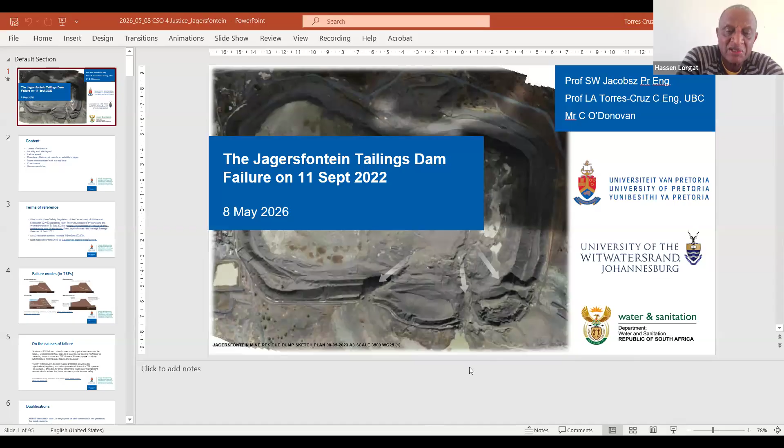So Professor Torres Cruz will start, and then he'll be followed by Professor Jacobsz, and then we will open up for some questions. They acknowledge that they are technical people, so a lot of what they'll be saying will be over our heads, but bear with us. And if there are some questions that you don't understand, some of the phrases that they're using, please, let's challenge each other. You are free to ask, but note full well, we've only got an hour and 20 minutes. So we need to get through the presentations as well, but you can't let misunderstandings roll over. So if you don't understand some of these points, the professors are very willing to engage, as long as we don't get derailed.

For both professors, these are communities, these are mining activists. The last time I looked, I didn't see whether they've attended, but one of the Human Rights Commission's commissioners was also going to be attending. So basically people around the social justice movement will be attending. Not many engineers registered for this. Okay. Over to you, Prof. Torres Cruz.

Thank you. Thank you very much, Hassen. Can you please confirm again, pardon, that you can see my slide in full screen? Yes, we can. Okay, thank you.

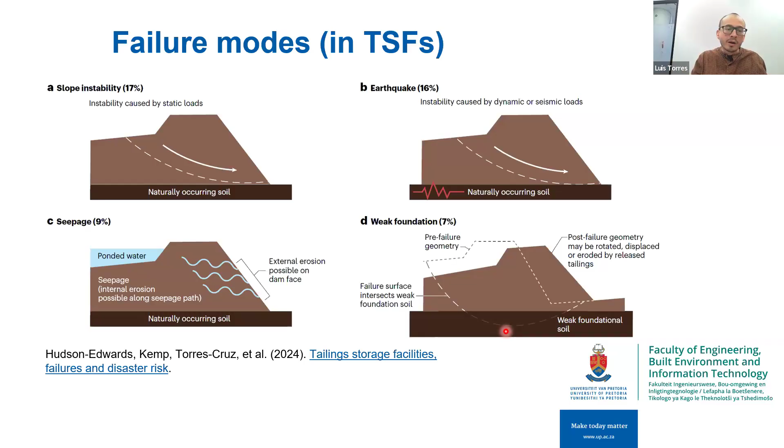So that is one way of thinking about it when we ask ourselves, okay, why did such and such facility fail? One could say, oh, because of the earthquake, or because there was overtopping of the water, or because there was a weak foundation layer, and so on. However, it is important to realize that it is not the only way in which we can think about the causes of the failure. And here I would like to read a couple of excerpts to make this point more clear. Analysis of TSF failures often focus on the physical mechanisms of the failure.

Understanding these aspects, these physical mechanisms, is essential, but it is insufficient for preventing the reoccurrence of TSF disasters. Human factors contribute substantially to bringing about failures and disasters. So what do we mean when we talk about human factors? Well, human factors involve decision-making processes as well as the organizational, regulatory, and industry context within which a TSF operates. For example, human factors could be difficulties for safety concerns to reach upper management, or remuneration incentives that favor short-term production over safety.

Those are human factors, which I repeat, are very important to understanding why a TSF failed, but which were out of the scope of our investigation. We were focused entirely on the geotechnical aspects. And as Hassen also noted, the scope of our investigation also excluded environmental effects of the failure.

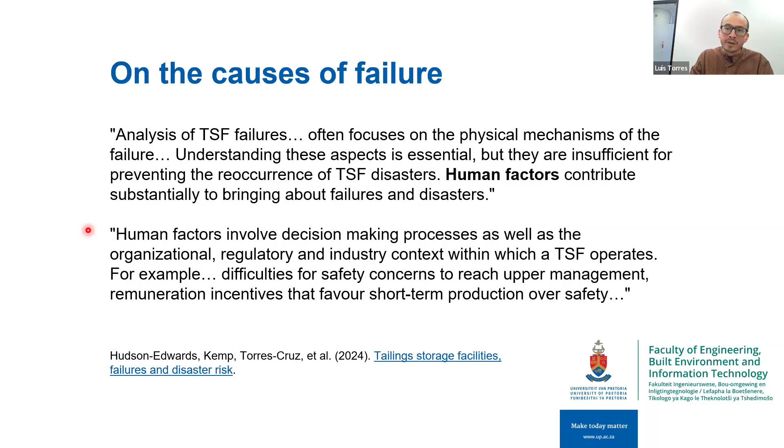A few qualifications about our investigation. We did not have detailed discussions with the employees of the mining company or with their consultants. This was not permitted to us for legal reasons. And therefore, some of our findings could not be tested. We would observe certain things in the satellite image, we draw a conclusion, but we have no way of confirming this with employees of the mining company or the consultants.

So the investigation actually had two components. One was on the geotechnical aspects that we are going to be focusing on today. And as noted earlier, that was led by Professor Jacobsz, with me being the second co-author. And the other one was a dam break analysis, which is also a technical type of investigation in which essentially you model, if there is a breach in the dam, where are the tailings going to flow?

We were briefed by engineers from the Department of Water and Sanitation. Our first site visit took place in October 2023. We conducted an extensive desk study, which essentially refers to gathering all the documentation that you can possibly gather about a site without going to that site. And that desk study included the study of some reports, analysis of aerial and satellite images, and also of survey data, meaning the topography of the site. We conducted our own site investigation in January and March 2024, and also collected some samples of tailings for testing.

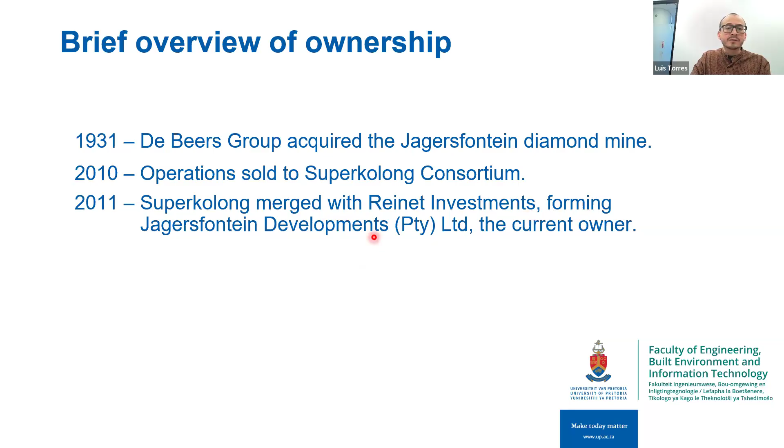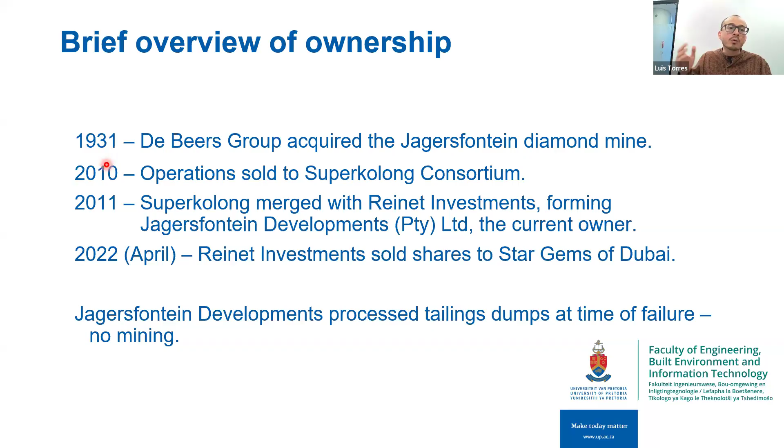In 2011, Superkolong merged with Reinet Investments and formed Jagersfontein Developments, which is the current owner. In April 2022, a few months before the failure, Reinet Investments sold their shares to Star Gems of Dubai. And it is important to emphasize here that after 2010, when operations at the mine got restarted, all those operations did not involve further underground extraction of the ore, but rather involved the reprocessing of the legacy mine waste that was already on the surface, like the one that I showed over here, reprocessing of this mine waste to extract further diamonds.

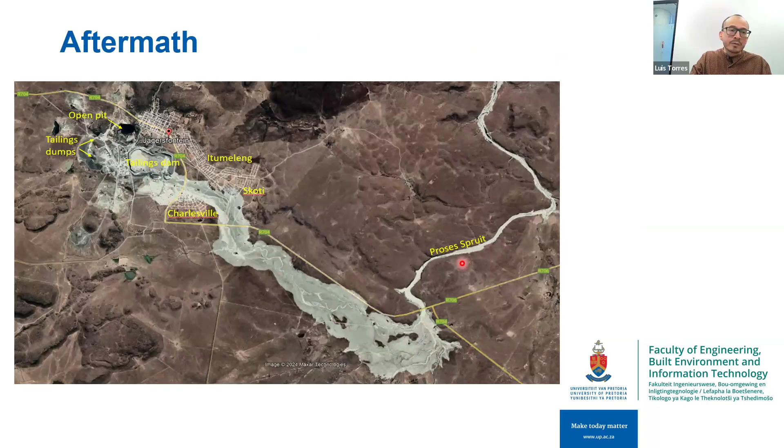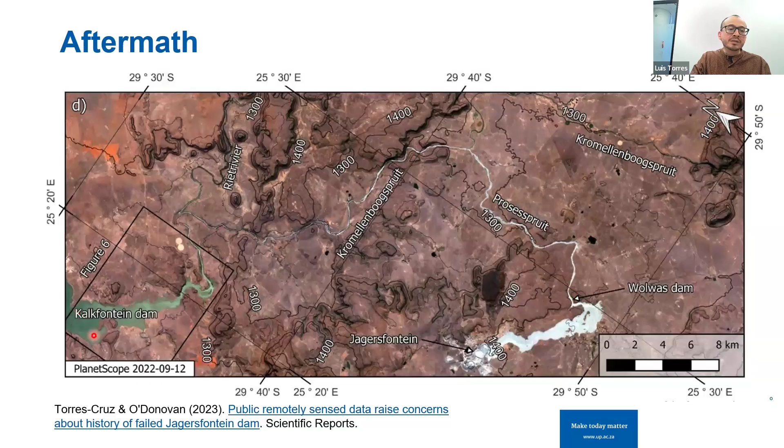Here we see an image of what the site looked like shortly after the failure. Here's the tailings dam. This is the area of the breach, and the tailings flowed approximately 7 kilometers over land until they reached the Prosesspruit. And now if we zoom out again, this is the TSF over here. This is this 7-kilometer flow over land until it reached the Prosesspruit, and then it flowed an additional 56 kilometers until it reached the reservoir of the Kalkfontein Dam.

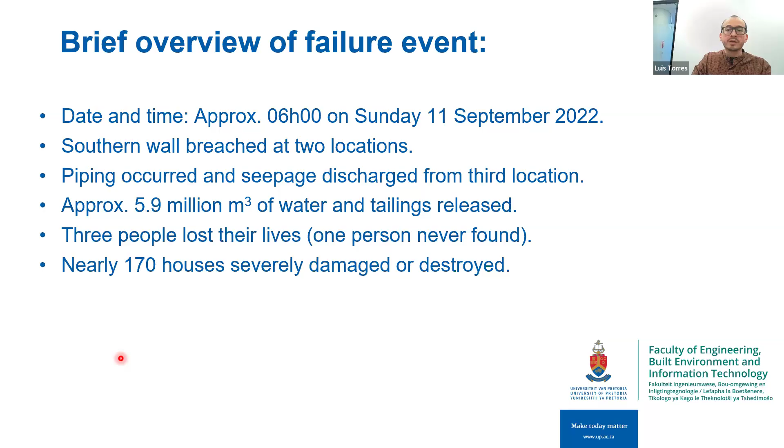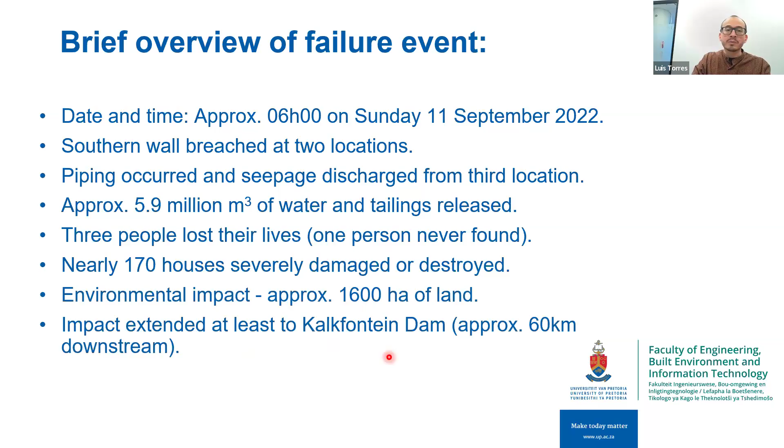So a brief overview of the failure event. This happened at approximately 6 a.m. on Sunday, September 11 of 2022. The southern wall breached at 2 locations, and piping and seepage occurred at a third location. Approximately 6 million cubic meters of water and tailings were discharged. 3 people lost their lives, including 1 person that was never found, and nearly 170 houses were severely damaged or destroyed. There was significant environmental impact, and as I pointed out in the previous slide, the tailings reached the reservoir of the Kalkfontein Dam, which is approximately 60 kilometers downstream from the site.

We move on now to the analysis of aerial and satellite imagery, which played a very important role in our investigation. So when we refer to aerial imagery, this means pictures that were taken from an airplane as opposed to from a satellite.

So let's start with those aerial images. Those images were sourced from the Chief Directorate of National Geospatial Information of South Africa, which actually has a very comprehensive database of aerial images for different parts of the country, including Jagersfontein. So here we have some of those images, and you can see that they date back to 1944, and then we have another one, 1948, 1955, 1962, and 1973.

And what I want to highlight here is that already in 1944, there was a TSF in place. It looked very different from what it looked like when it failed, but it was there in place. And you can see that there are these dumps of mine waste around it. And importantly, these dumps of mine waste continue to be present all the way to 1973, which is 2 years after the mine had closed due to ore depletion.

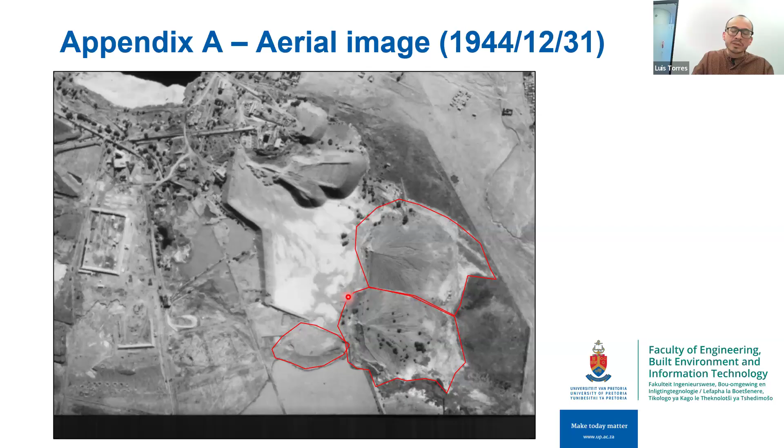So I'm going to zoom in now into this figure from 1944 so that you can appreciate those dumps of legacy mine waste more clearly. Now, having brought your attention to these dumps of legacy mine waste, they do play a role in our explanation of the failure, which is why I am highlighting them to you. Now, Professor Jacobs will proceed to guide you through the analysis of the satellite images.

This table summarizes all the high resolution satellite images that we used. And I just want to point out that we tried to be very comprehensive in the satellite images that we used. We used publicly and freely available satellite images, but we also asked multiple suppliers of satellite images whether they had images of the site, and we purchased every image that we could get our hands on. And with that, I will stop sharing and switch over to Professor Jacobs.

Did I stop sharing now? I think so. Okay. Can I just confirm whether everyone can see my screen? Yes, it's loading. Yeah, we can see it now.

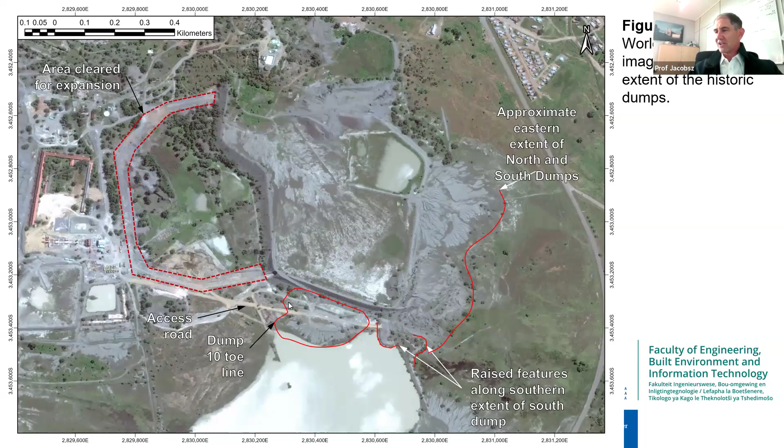So we are then going to move on to the next photo of the tailings dam, and this is at the end of 2010, and you can see that construction commenced on a western compartment of the dam. So they cleared the site, started with the construction of the walls, and I show the outline of the dumps again. The dump to the south of the De Beers Tailings Dam was known as Dump 10. So I labeled this as Dump 10. That is also how they refer to it on the mine.

Moving on to another photo, this is now 2 years later. You can see that the walls of the western compartment have been completed, and the mine had started to deposit tailings in this facility. So you can see that the trees are being submerged. Then we move on to the end of 2012, another photo. You can just see more deposition in the compartment that was newly constructed.

And you can also see the deposition point where I'm pointing with the mouse. You can see this semicircular area from which tailings started to fan out as it is deposited on the dam. So this was the only deposition point on the tailings dam, and all tailings always got deposited from the single point.

Moving on to our next photo. What's happening in this case is that you can see that the Jagersfontein development started to reclaim the old dumps to the east of the original De Beers Dam. So you can see some of the material that's been removed here.

And sorry, I just want to move this toolbar out of my way.

So you can see they are busy removing material, and a conveyor belt had been put in place along the southern wall of the old dam to take the material reclaimed to the plant. So you can also see that compartment, the new compartment in the west, had been substantially filled already.

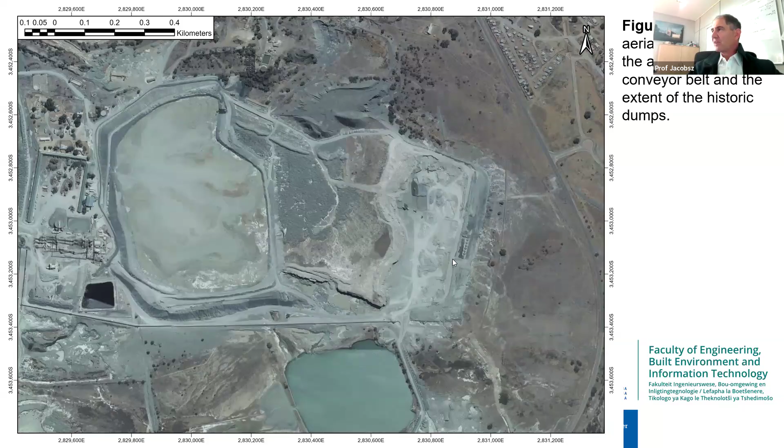Then this is moving to 2016, so approximately 6 months after the photo that I just showed previously. Again, you can now see that the construction had commenced on an eastern compartment as well. So where the old dumps were removed, the walls were extended, and a new embankment was built, and a new compartment was being commissioned.

And you can see that some slimes or tailings had already been deposited in part of this facility. Important to note that the conveyor belt is still in place, and that most of the material that comprised dump 10 has not been removed. That material is still largely there.

Then moving on to 2017, what happened in this stage is you can see that deposition had advanced very significantly in the dam, in the eastern compartment. The eastern compartment was now beginning to submerge the old De Beers Dam. You can also see a new dam wall had been constructed to form a containment around the old De Beers Dam. So the old De Beers Dam fell within this newly constructed dam.

So this wall that I'm pointing out here, this is the area where the wall failed. It's very important to note that this was constructed from 2015 onwards. It is a new wall that failed, relatively new. Nothing to do with the old De Beers Dam. So what failed was new.

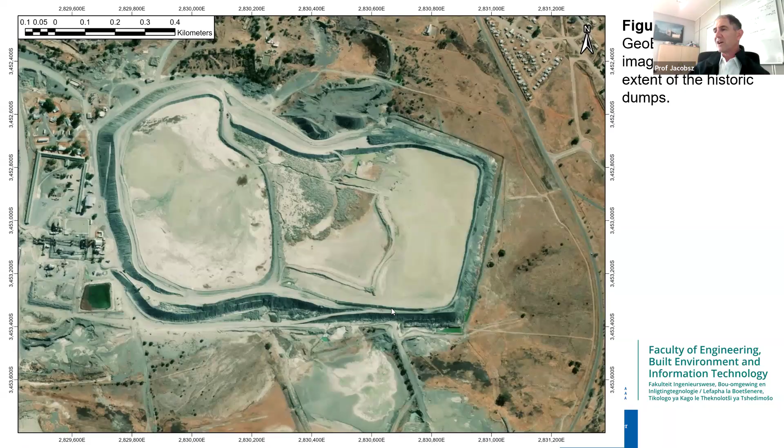An important feature in this particular photo is that you can see an access road running along the southern wall of the dam, and the access road here is fairly straight and it goes on to the dam with a ramp. And to move to our next photo, this is now 2 years after the previous one.

You can see that the dam had grown substantially. The old De Beers Dam had been buried, and you can see that compartment one, the western compartment, had also received quite a lot of tailings, but the new eastern compartment now completely submerged the old De Beers Dam. I want to point at the access road running along the southern wall of the dam. Important to note that this is a straight road. This is February of 2019.

Then this is a satellite image taken 6 weeks after the previous, dated the 22nd of March 2019. And it was a slightly overcast day, but there is a feature that I'm pointing out here that points to instability of this wall. I'm going to go one photo back. This is what the photo looked like 6 weeks earlier. And there seems to have been quite a bit of movement in this part of the wall. I will show you some images later which will show this movement more clearly.

You can also see that between the two photos, this is again February, the dam was empty. Rain occurred from the middle of February and it filled the dam. Dam completely filled. And I'm now going to go to the next photo, which is 2 months later. So this is the May 2019 photo.

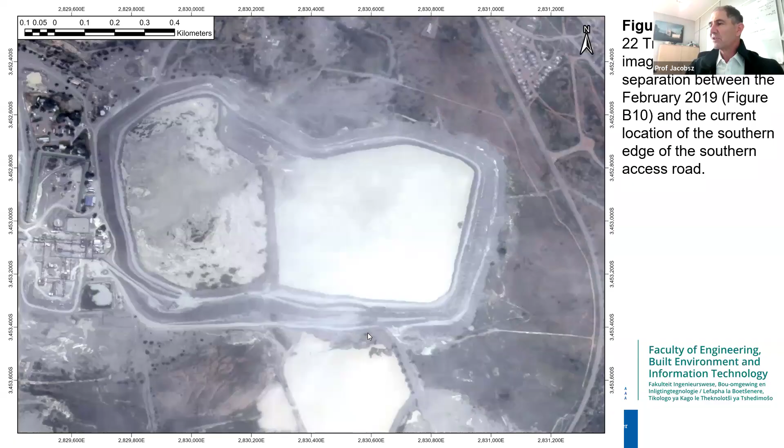And if I go back a few photos and play through these photos, you can clearly see the deformation taking place here. So this feature in the dam, I think it is some aquatic vegetation, is being buried by this advancing slope here. So let's go on to another photo.

This is now early in 2020. There was a circular feature constructed in the dam due to a bulldozer that got caught up in the dam. It fell into the dam and they rescued it. We had to really scratch our heads as to the reason for that, but it turns out that it was to rescue or retrieve a bulldozer. I just want to go to the next photo. So this feature has nothing to do with the failure on the dam.

What you can see now is this is now 6 months later again, so July of 2020. And by this time, the circular feature had been covered, largely due to the deposition of more tailings in the dam. And you can also see that the partition wall between the two compartments is beginning to be submerged, so that we were busy forming one big compartment on the dam.

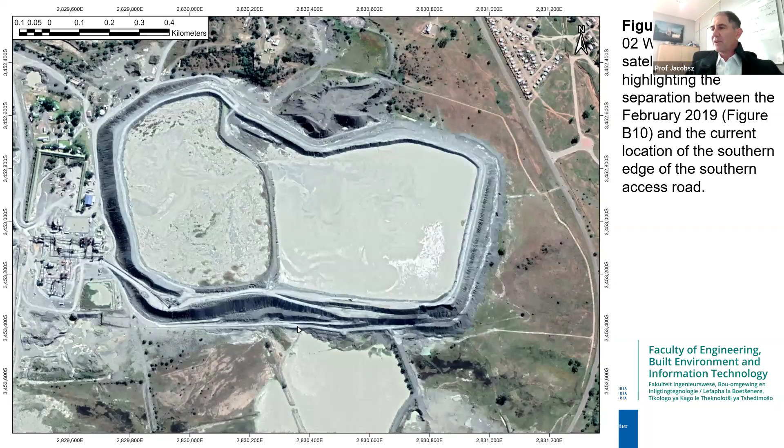I'm going to just go back a few photos, and I want you to look at the alignment of the road. The access road along the southern part of the dam was a straight road. When we go through the photos, you can see that this is now not a straight road at all anymore. It is curving very substantially to the south. So if I play through the sequence of photos, you can get a feel for the magnitude of movement which is busy taking place here.

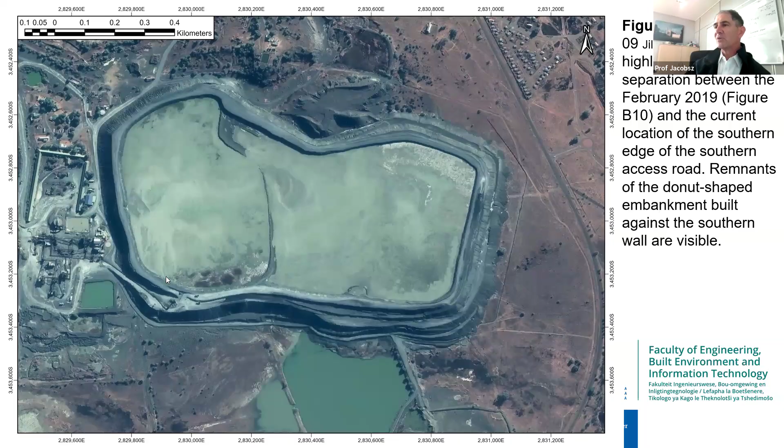Then I'm going to look at another photo. This is now a month later, and say another couple of months later. And the point is this: we see this continuous movement taking place along the southern wall. If you look anywhere else in the dam, we just see the normal raising of the dam, and you don't see outward movement, except opposite this water dam. This water dam, by the way, is known as Dam 10. So locally it was referred to as Dam 10.

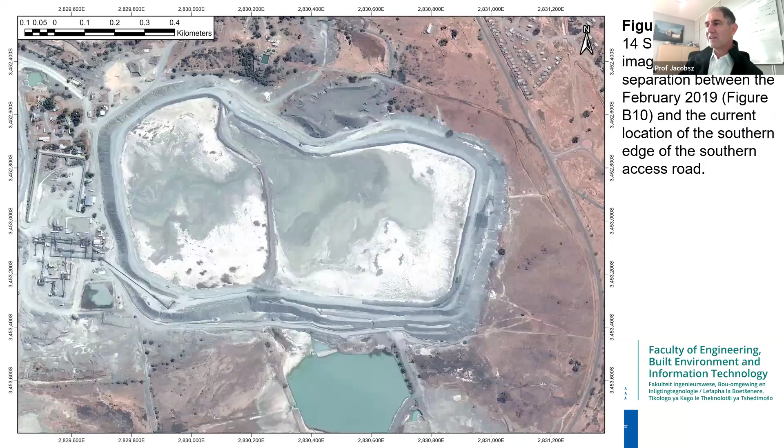So what we are showing you in this photo is going back to February of 2019. In late February 2019, after it started raining and the dam filled, movement started to occur. This is 3.5 years before the dam failed, and these movements were progressively advancing and developing, getting larger and larger until the failure. So this is now in May of 2022.

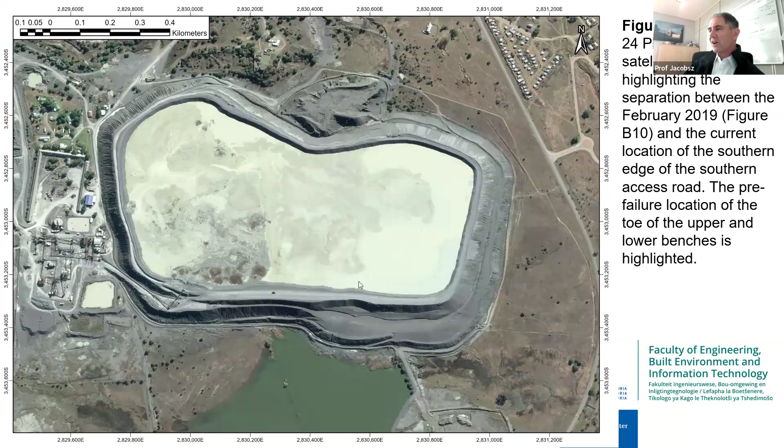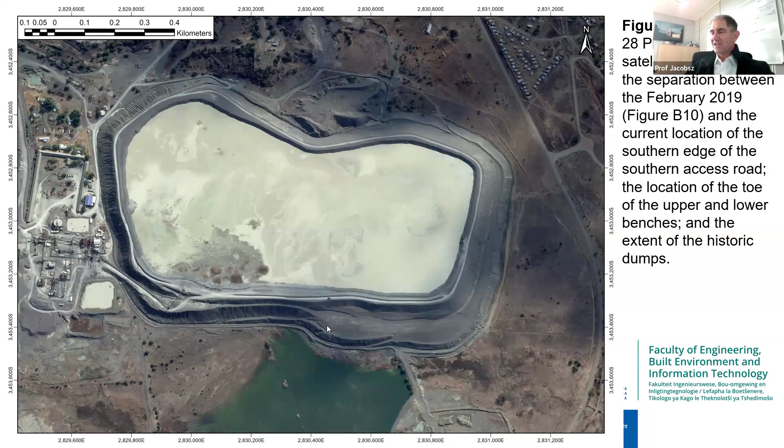We've got one last photo that we were able to purchase from July of 2022. And in the next photo, you can see this is the failure. This was taken by satellites the day after the failure event. But what we have seen is a very large amount of movement in the southern wall of this dam leading up to failure. So we have now examined the sequence of satellite images that show to us that there was a lot of movement taking place in this dam as far back as 3.5 years prior to failure.

So what I want to show you now is a completely separate and independent source of satellite images. These are so-called PlanetScope satellite images. It's a different satellite image provider, and they provide lower resolution images. I want you to keep an eye on this area where I'm pointing. This is where the dam failed. And the date you can see on your right-hand side. I'm going to advance these photos forwards and backwards a couple of times, and that will hopefully illustrate to you the deformation taking place along the southern wall.

So you can see this is around the date when that high resolution satellite image was taken, movement taking place in this area, and you can see construction busy reinstating the road over that, reinstating the crest of the wall. There you can see construction taking place in that area. But if I move through these images fast, you can see that toe advancing outwards over time.

I think it's maybe not perfectly clear due to the connection speed that we've got, but I hope you get the appreciation of the movement that took place in this area during the months of February and March of 2019. So a lot of deformation taking place in that area at the time. So this is from a completely separate satellite image. This is another satellite image. So this was PlanetScope. Looking at the before photo, this was taken on the 8th of September. The failure was on the 11th of September.

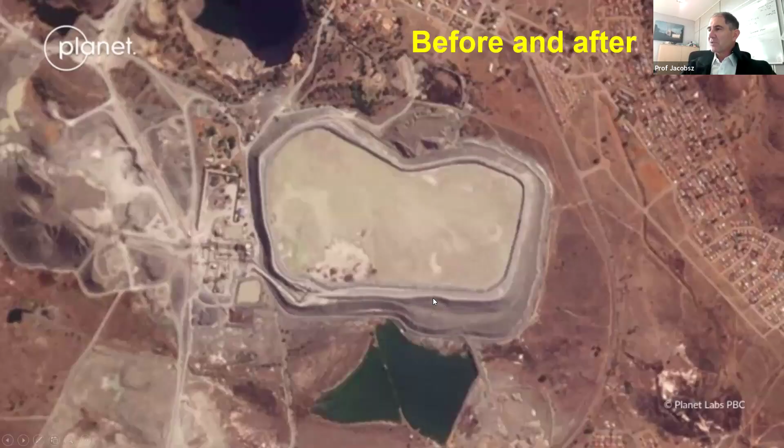And if we look at the photo on the 12th of September, then you see this, the breach had occurred. And when I play between these photos, you see that this block along the southern wall where the dam failed displaced outwards by a large distance. We do not see these outward displacements anywhere else on the dam, but it seems that this wall slipped on something underneath and it moved to the south, and that resulted in these failure zones developing. So a large amount of deformation took place.

So we were interested to figure out why was it possible for this dam wall to slip outwards on its foundation, as we are seeing in these photos. So this is a report that was written before the dam was built, just to illustrate in concept how they anticipated enlarging the old De Beers Dam. And the wall that failed is the one shaded in this pinkish color. And you can see the southern part where the failure occurred is where this wall was constructed over the old dump, which is called Dump 10, that I referred to previously.

So in this area where I'm pointing out the eastern parts, these dumps which covered the ground here had been largely removed. But Dump 10 had never been removed, and construction of the dam wall occurred over this material. I just want to show you a sequence of images just to illustrate to you how the dam was built.

So this red wall or pinkish wall was built like that shown there. So we call it the starter wall, and then that provided some containment, and it is made from a material which is called grit. So nice coarse grained material that they got from the tailings dumps that Professor Luis showed earlier. So they built this from the coarse grained material. It's a very good material, nothing wrong with it, and it is good for dam building.

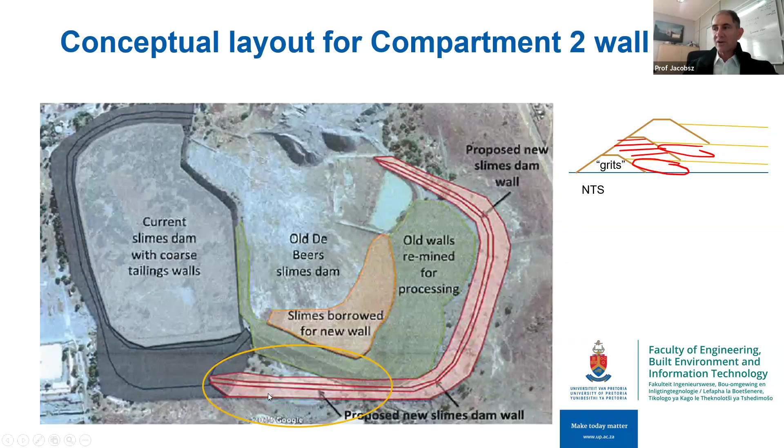That is our conclusion. You don't see movement in the dam wall anywhere else where this fine material from Dump 10 was not present. And our conclusion is that this material had a very low strength. There is evidence of that low strength from our own testing and testing by others as well. So a bit of a preview is why the dam actually failed, because this part of the wall was built over Dump 10 without removing the material that formed Dump 10.

What I want to do is just to highlight a number of as-constructed details of this dam. Tailings was only delivered from a single point in the west. So this is a picture of the dam, and the delivery point is where the arrow points. Usually we have a ring pipe that goes around the dam so that we can deposit tailings anywhere. In this case, there was only a single point. There was also no decant system on the mine. Usually near the middle of your tailings dam, you have a pipe, and excess water will flow into that pipe, and that is how we remove excess water from a dam.

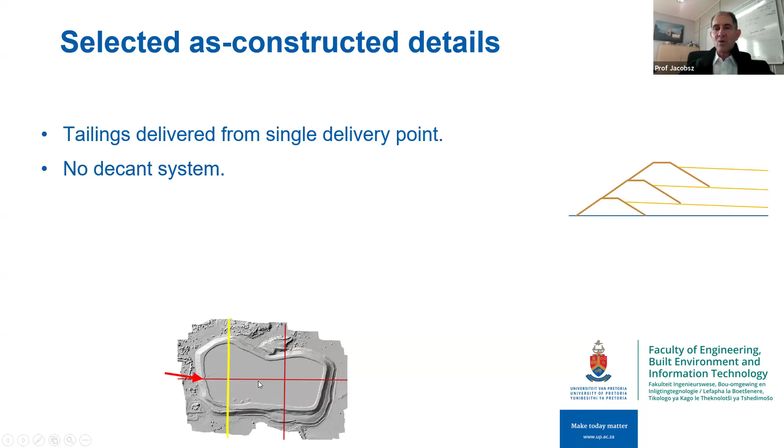In this case, there was no such facility, so water had to leave the dam by means of evaporation, or it had to leave it by means of seepage. So you can get seepage and you can get evaporation, but there was no other way to remove water from the dam.

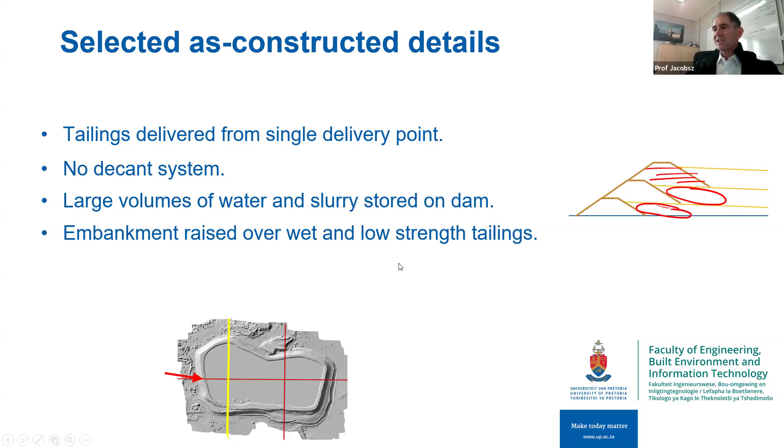It is also important to note that a large volume of water and slurry, so fine slimes, were stored on the dam at all times because it was not possible to remove that material. The embankment was therefore raised over wet material of fairly low strength. So when part of the embankment was raised, you would have had to construct over these fine-grained, weak materials, slimes over which you had to build your raised sections of embankment. So that is a couple of aspects that I feel is important for us to appreciate.

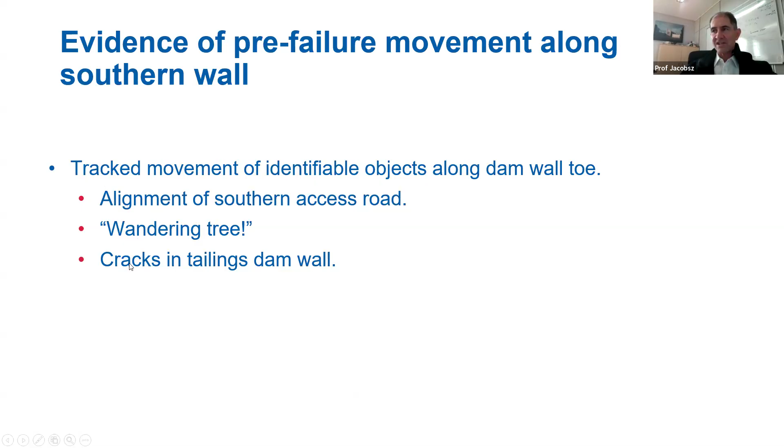What I want to show you is a couple of additional satellite images that show additional movement, more than what I've shown you up to now. So there's been evidence of movements along the southern wall of this dam for 3.5 years prior to failure. And I want to show you the movement of the access road. There's a tree that moved. We call it the wandering tree. And then there are cracks in the tailings dam that we could see even on Google Earth images that anyone could access.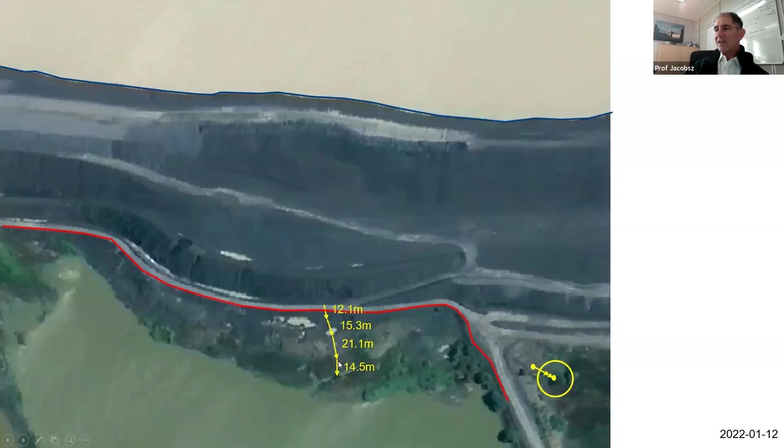So if you move on to the next photo, this is the new road alignment, and the patch had now moved by 12 meters. Looking at our next photo, the patch had now moved another 15 meters. The road alignment is very significantly not straight anymore. It used to be a straight road. Looking at a photo sometime later, you can see another 21 meters in that shrub. And then it moved 14 meters more, 7 meters more, and then the failure occurred.

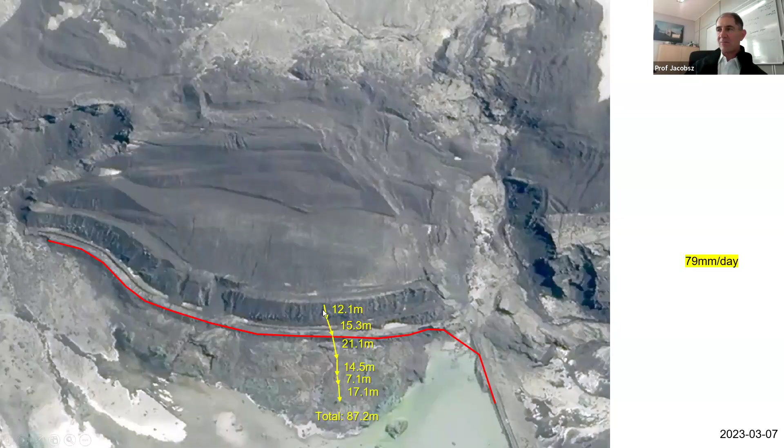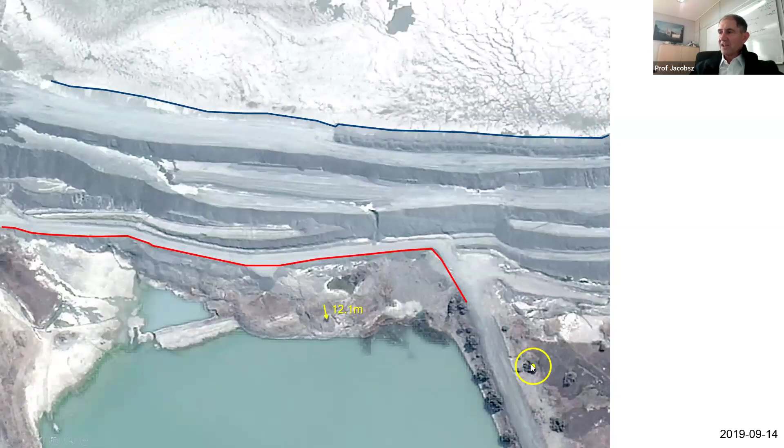There's another disconcerting feature, and this is this tree, which I circled with this yellow line. It's not very clear to see on this overcast day; the photo was taken under overcast conditions. The next photo shows it better. There's the tree, and this tree then started to move. There is the same tree. You can also see there's evidence of deformation in this area where I'm pointing. And then the tree moved, and it was beginning to walk past its neighbor.

You can see it was standing here originally, and it moved over the course of the 3 years prior to failure by approximately 28 meters. The fact that that tree remained green tells us that it must have moved with its root system intact, which tells us that this is deep-seated movement, not only superficial movement. So, very substantial evidence of movements along the toe of the dam prior to the failure event.

What I want to also show you then is evidence of cracks. This is a Google Earth image taken in September of 2020, 2 years before the failure event. If you look at this area where I'm pointing with the mouse, you can see a faint feature which looks like a crack. The resolution of this image is 30 centimeters, which means that the smallest feature that a pixel can identify is about 30 centimeters. So the fact that we can see this crack on a satellite image tells us that it must have been substantial.

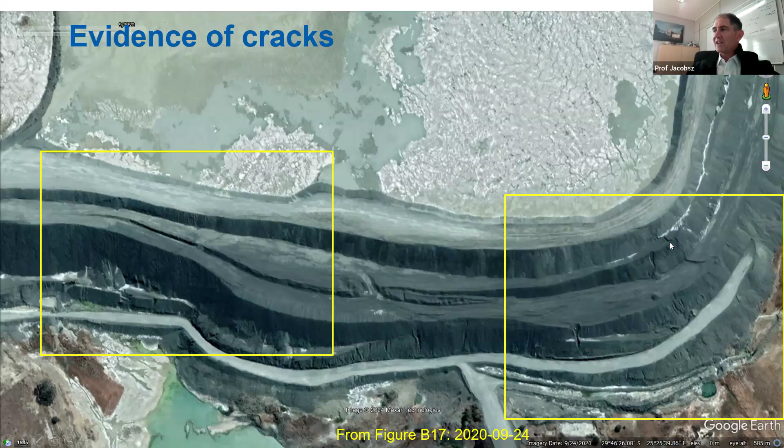Then if you look at the eastern part, near the southeastern corner of the dam, there's also more evidence of distress with crack-like features that I'm pointing out. If we zoom into the first one that I showed, we can see better that the crack existed, and then I can show you the other one as well. There's some evidence of the crack.

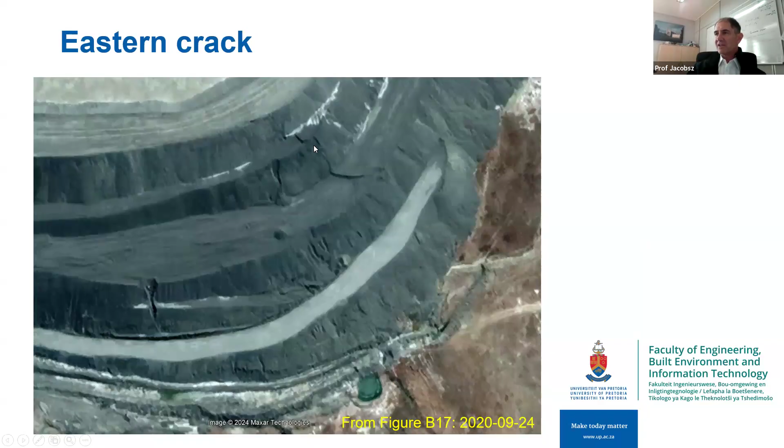And if we superimpose these cracks, the locations with respect to where the dam failed, you can see that there's close correspondence with the breach zone. So this is the one indicated with the yellow dotted line and the one crack, and then what we call breach 3 and the other crack. So there's good correspondence between those pre-existing cracks and where the dam ultimately failed.

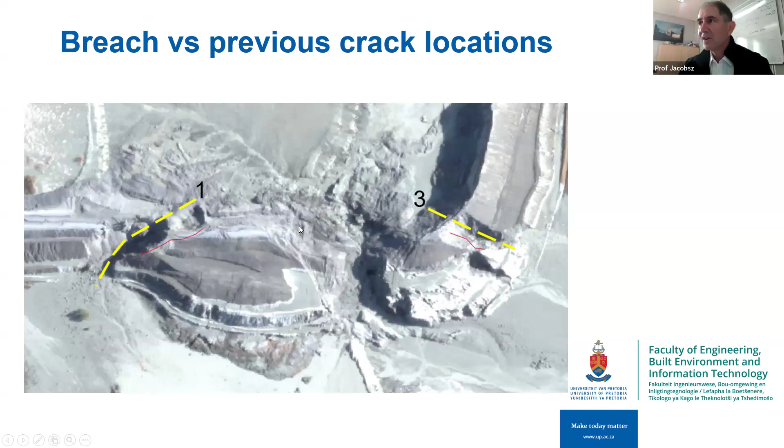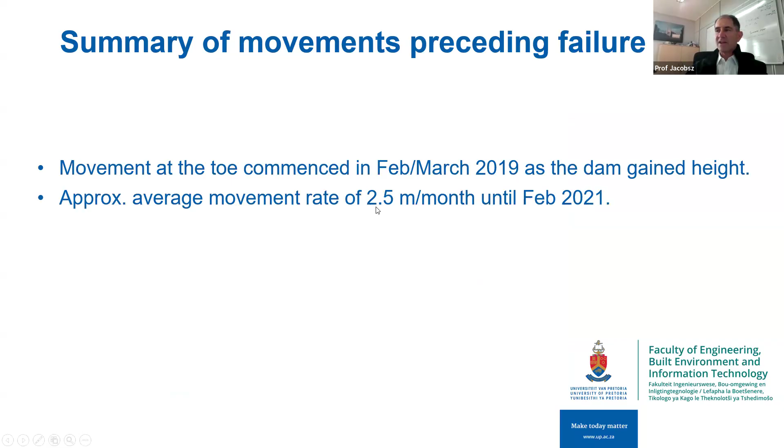So what we saw on this dam, to summarize, is movement commenced in February of 2019, as the dam was gaining height. We saw an average movement from February of about 2.5 meters per month until February of 2021. So that was over a period of 2 years. It moved by roughly 2.5 meters per month. And then it slowed down a bit until failure.

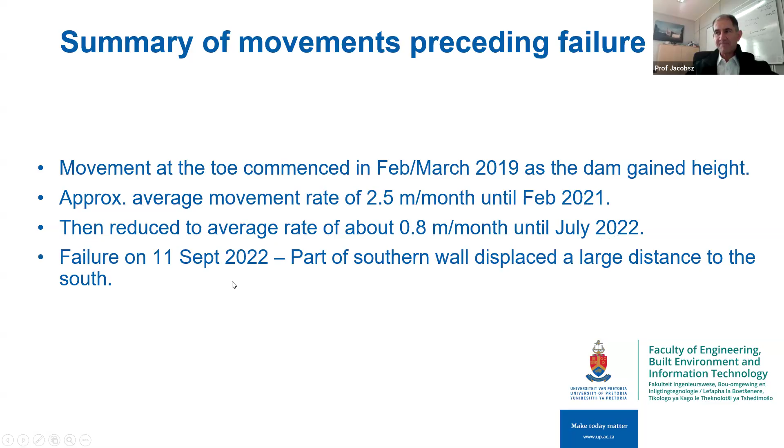So from February 2021, it moved about 0.8 meters per month until July of the year of the failure, which is the last photo that we had. Then the failure occurred, and during the failure on the 11th of September, a large part of the wall moved a large distance, about 15 meters to the south. So that is what physically happened during the failure event.

Then we also investigated survey data. So the mine surveyed the tailings dam every now and again, and we could look at the geometry of the dam from the survey data and see how it changes over time. So an important question that we had to ask is, did this dam overtop? Did they store so much water that the dam overtopped?

So what we are looking at here is a picture of the dam, and the yellow line that I'm highlighting there indicates a cross-section through the dam at the position of that yellow line. So you can see the pool inside is this big, large, flat area. And the southern wall was 3 meters higher than the pool, and the northern wall 6 meters higher.

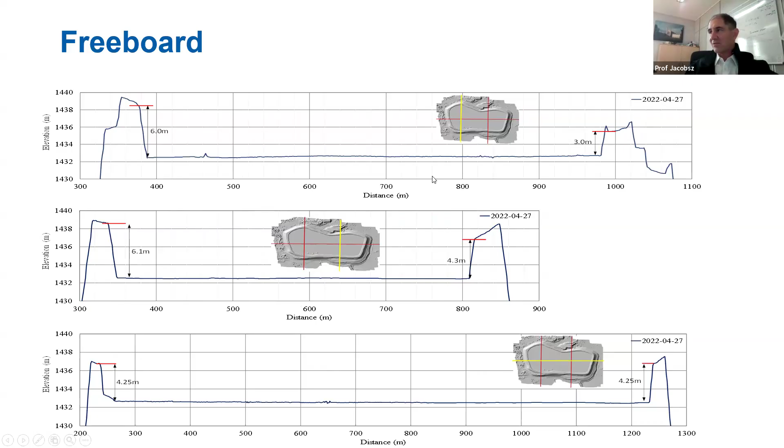If we look at the geometry on the yellow line on the right-hand side here, you can see a 6 meter high wall, 4 meter high wall. And then if you look at the line drawn from east to west through the dam, the walls were 4 meters and over 4 meters high. So this dam did not fail because it overtopped under normal conditions, because the dam walls were quite a lot higher than the slimes level in the dam. So it was not a mere overtopping issue.

Then I'm not going to show a lot of survey data. I just want to show two survey cross sections. So this is a cross section through the dam at the place where it failed. The red line shows the July 2021 geometry. And then the other profile, the blue one, shows the situation roughly 9 months later, in April of 2022. So red line is 2021, blue line is 2022.

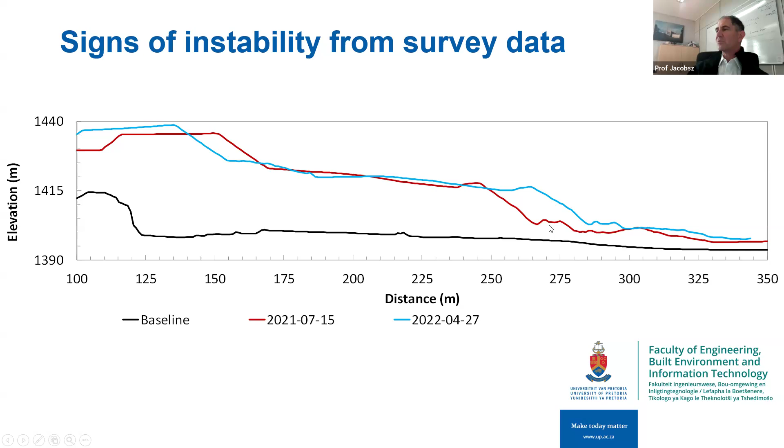And we were interested to understand the movement that was taking place. So what we did is we drew a line on the ground level, which is the black line, onto which the dam was built. So if we draw that red line and offset it, you move it upwards to the toe of the dam. So this feature where I'm pointing here is the access road on the south of the dam. This is from the July 2021 photo. And where I'm pointing now is the same access road, but in April of 2022.

So the access road had moved from this position here to this position. Sorry, I'm not drawing so well. The road moved to this position here from this position here. And you can see that the line that I drew here still cuts through the road. It seems that the whole situation is sliding in the direction of these arrows. So the whole dam seems to have been sliding like that.

And if I then move this line through the crest, you see the crest was there and the crest is now over there. So it seems that everything was sliding down this flat slope. So that is also the survey data confirming the very large movements that we identified from the satellite images.

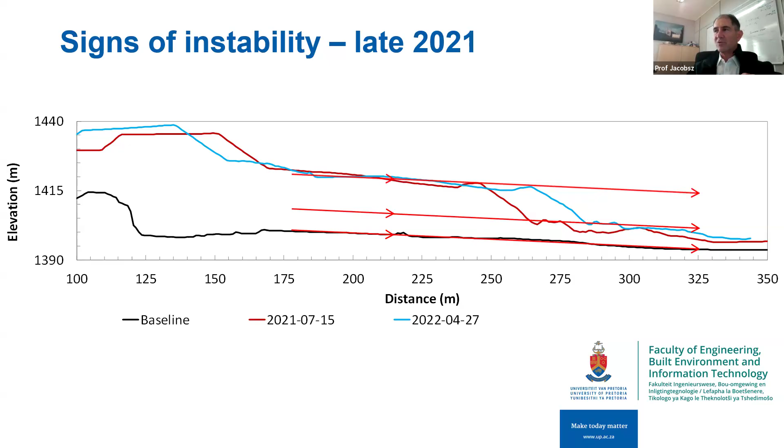So we learned about the movement both from the survey data and from satellite images. Then the failure event itself. I just want to talk through the sequence of events that happened. This happened on the 11th of September, early in the morning, 2022. So there were some eyewitnesses who reported activity on the dam the night before the failure.

But I need to point out that the operation of the dam was 24-hour activity, and that it was not unusual for activity to be taking place on the dam during the night because it operated on a 24-hour basis. So we have eyewitness information to tell us that the crest of the dam wall failed on the southern wall where the dam broke towards the inside of the dam at about 6 o'clock in the morning. I will demonstrate that with this picture.

So there were people on the dam at the time of failure, and they observed this failure occurring to the inside, and how it failed is more or less as I'm showing there. So we got the slip failure to the inside on the morning at 6 o'clock. And the shock associated with this movement that took place there then caused this dam, which has already been sliding for a long time, to start sliding again.

And what I'm trying to demonstrate here is how we understand this sliding to have taken place. So we first got this failure taking place to the inside. The shock with that then disturbed the balance in this dam, and it started to slump like this. So it slumped, the crest lowered because of this movement, and that caused the crest level to go lower than the water level in the dam.

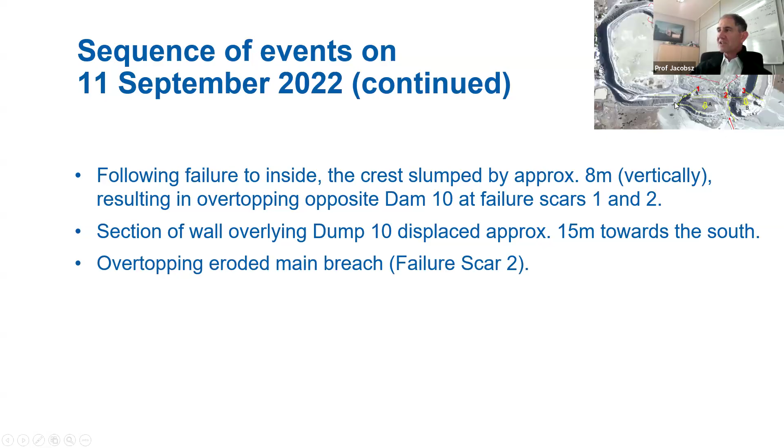So overtopping then occurred due to that slumping at locations 1 and 2. And at location 1, we were told by eyewitness accounts that material from the sides fell into the breach, and that stopped the failure from progressing further in this area. But the failure then focused in the area at location 2, and that is where the main failure occurred. So material washed out there, all 6 million cubic meters that flowed out. Most of it flowed out at location 2.

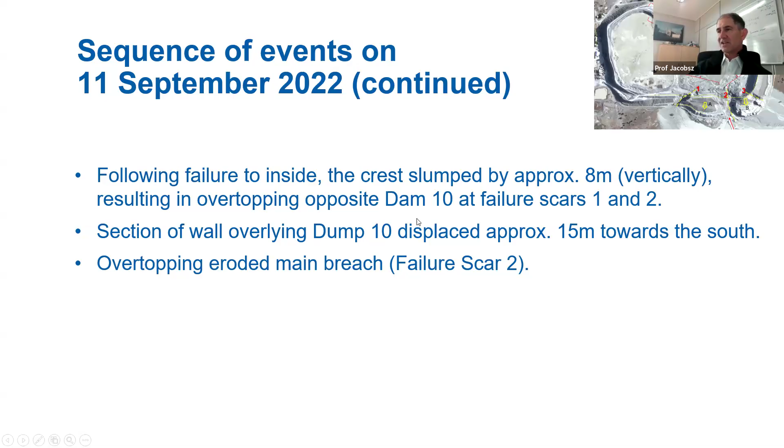Location 3 was just where the wall slipped, and there was a little bit of erosion taking place, but not sufficient to break the dam, basically, in that area there. I've mentioned the volume of the material that flowed out. And then, the scar 3 is where some piping occurred. We don't need to dwell on that.

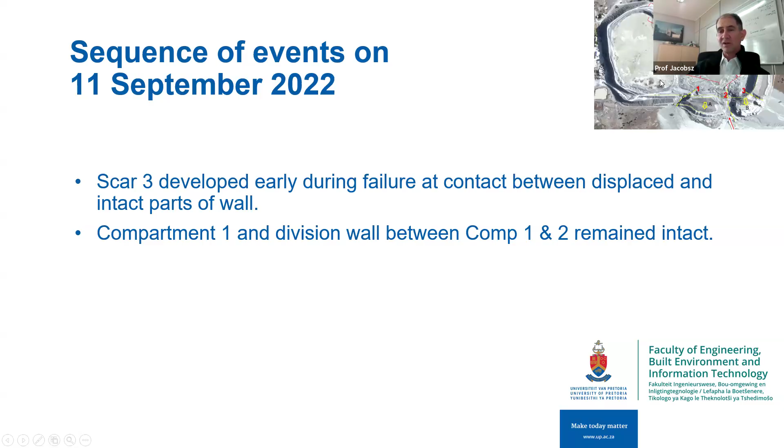Interesting to note that the partition wall between the old compartment 1, the western compartment, and the newly formed compartment 2, that partition wall remained intact, and we are very grateful for that, because it means that the material from this essentially did not flow out and take part in the failure. So at least that partition wall stopped material from the western compartment from also failing and flowing out.

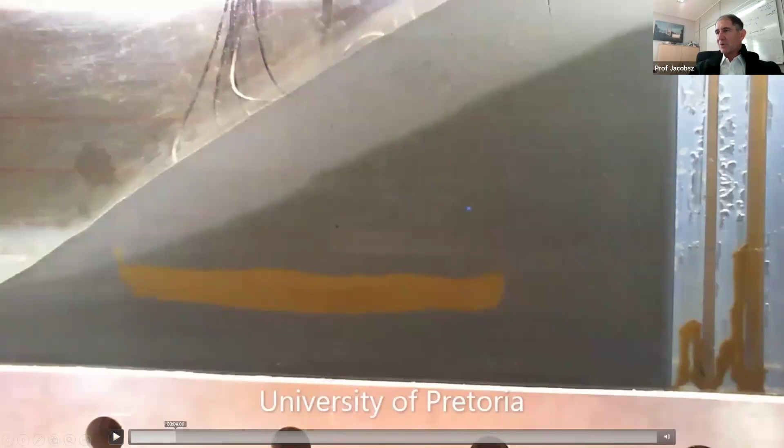I just want to show you a model. So here at the university, we have machines that allow us to test models of failures like this. So when you look at a slope like this, and this gets to failure, a failure takes place like that. So you can see that this material is slipping on that roughly orangey material there. And then if you allow overtopping there, you can see overtopping as water starts to flow from the right-hand side.

In our model, we didn't have a lot of material, but that amount of overflow in Jagersfontein was a lot. There was a lot of material behind the wall that could flow out, and that washed away the entire dam wall and caused the failure to take place in the way that it did.

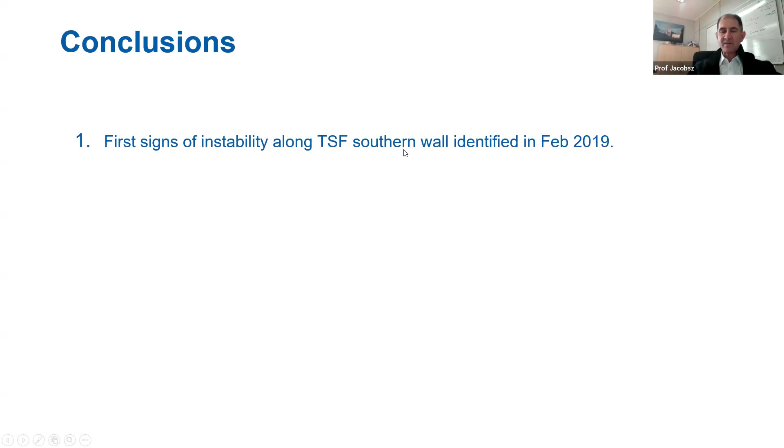Okay, we are about at conclusions. So we concluded that the first signs of instability on this dam were identifiable from satellite images in February 2019. There was then near constant movement between the coarse material which formed the walls, the so-called grits, and the underlying fine tailings in the southern wall of the dam, in the area overlying dump 10.

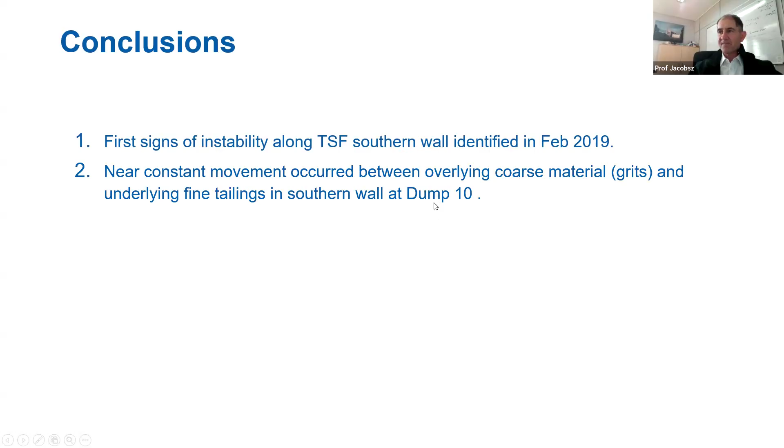Then, as the movement continued, Jagersfontein Developments, we said here, presumably attempted to compensate for the movement by placing more material. So they continuously raised the dam in the area where the movement took place, we think, to compensate for the movement that was constantly taking place. All the while, the dam was raised further and more tailings was deposited inside the dam.

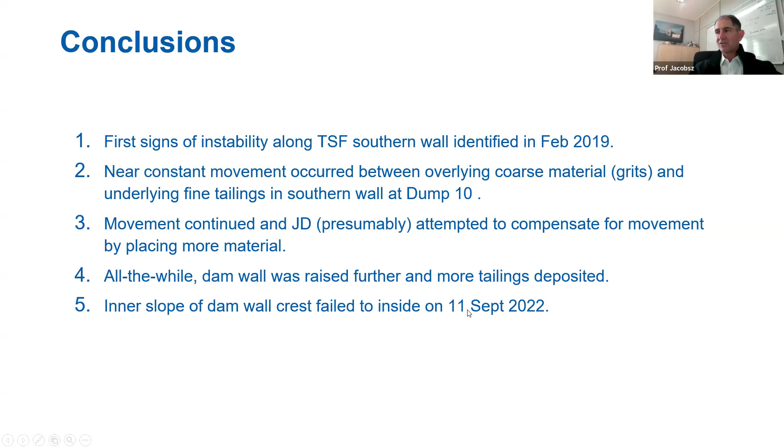The inner slope of the dam then failed to the inside on the morning of 11 September. We have eyewitness accounts to confirm that. This triggered the final failure, so the shock associated with that internal failure provided just that shock to remobilize the sliding on the dump 10 material.

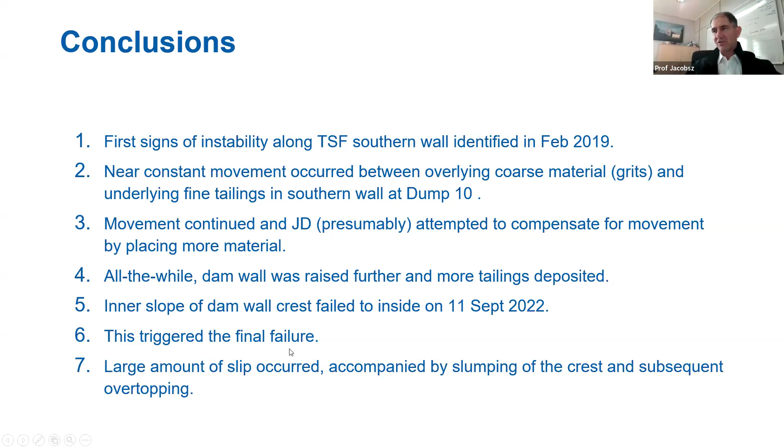And a large amount of slip occurred, accompanied by slumping of the crest. That slumping of the crest went under the water level in the dam, and that resulted in the dam overtopping at the failure zone. And that is how the dam then failed.

So our recommendations: we were on site more than a year after the dam failed. It is urgent to investigate failures like this immediately after the failure event, not a year afterwards. So there are various reasons why this happened so late. One of them is because of the cost.

The Department of Water and Sanitation went to the engineering fraternity and asked companies to tender to do this, and it just came back at very high cost, and therefore they approached our two universities, and our universities conducted this as a research project at a very much reduced cost.

So the value of optical satellite imagery, I think, was nicely illustrated here. You must remember that there's an eye in the sky watching all the time. Nothing can be hidden. There are satellites watching literally every day what is happening.

We recommend that dam wall performance needs to be monitored carefully. You need to monitor for movement, and you need to monitor for the water pressure in the dam. Those did not happen as far as we could understand in this particular dam.

Then I showed you the water dam immediately to the south of the tailings dam. You can have a water dam next to a tailings dam, but you need to carefully design for that. It is not ideal to have a water dam on the toe of a tailings dam. You can have it if it is well designed, but it is a risk, in my opinion.